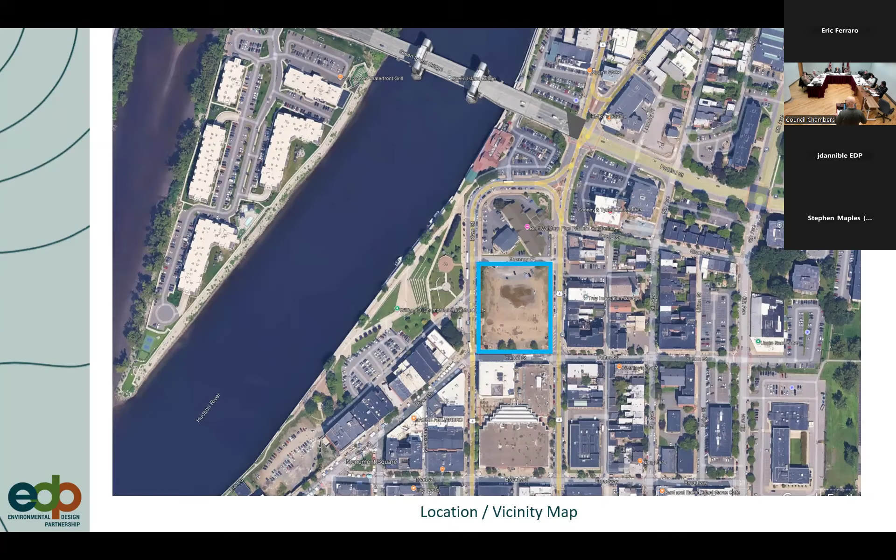I was under the impression that the easement would also grant access to City of Troy emergency vehicles. Yes, so it's an ingress egress easement. Does that need to be a separate easement, or is that covered in that easement language the city has? Doesn't have to be, it could be covered in one document. Let's put it that way.

But the point would be that you couldn't close it off to prevent access — not closing it off, it's to prevent access in perpetuity to the hotel, for their use. And I think similar to any parking lot in the city, in any development, if there's a fire in a building, emergency responders have the ability to use that parking lot. I didn't know there'd have to be a specific easement over that for city use. I think I would be more comfortable if it just granted city emergency access through there.

Okay, okay, I will bring that back to the attorney as well, for posterity. Yeah, simple enough. And like I say, that probably makes sense to get it to you in draft form if you have some additions to it before everyone's executed and it's filed. Yeah, obviously any input of mine would be subject to the agreement of the parties. So, yep.

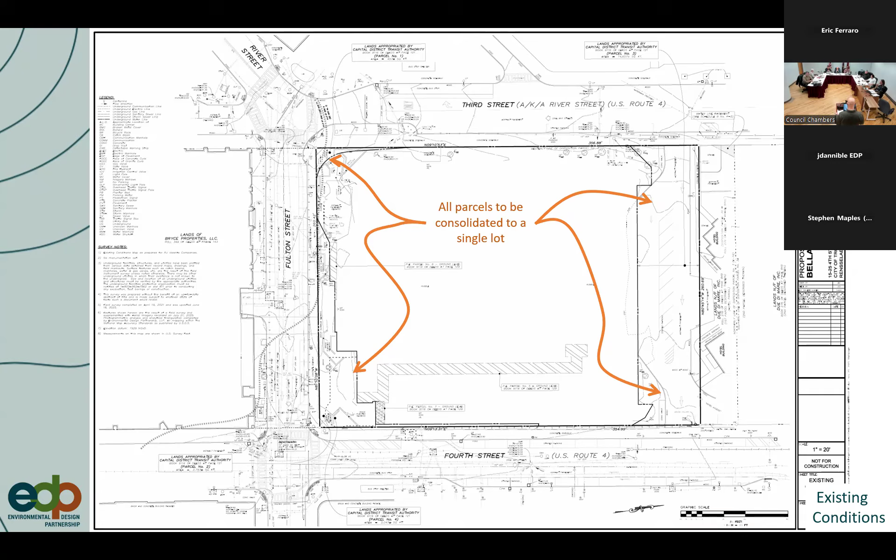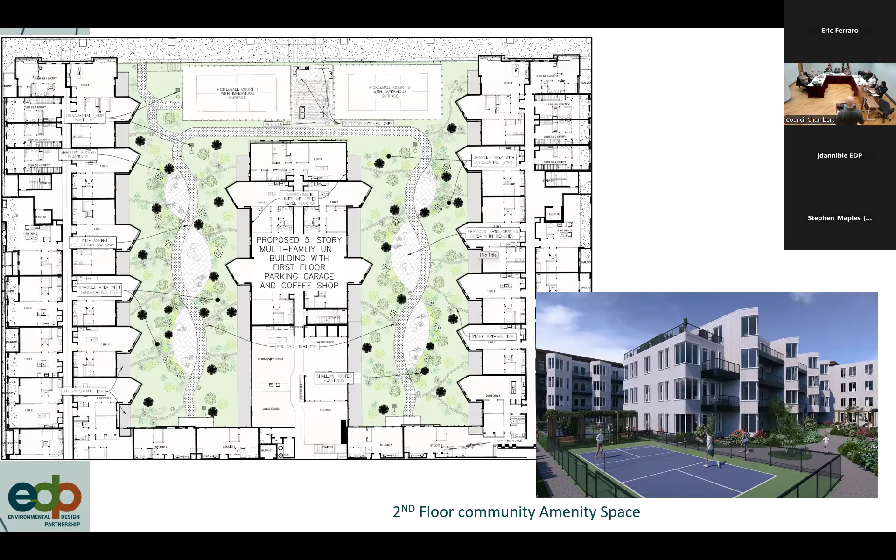Okay. My computer wants to update.

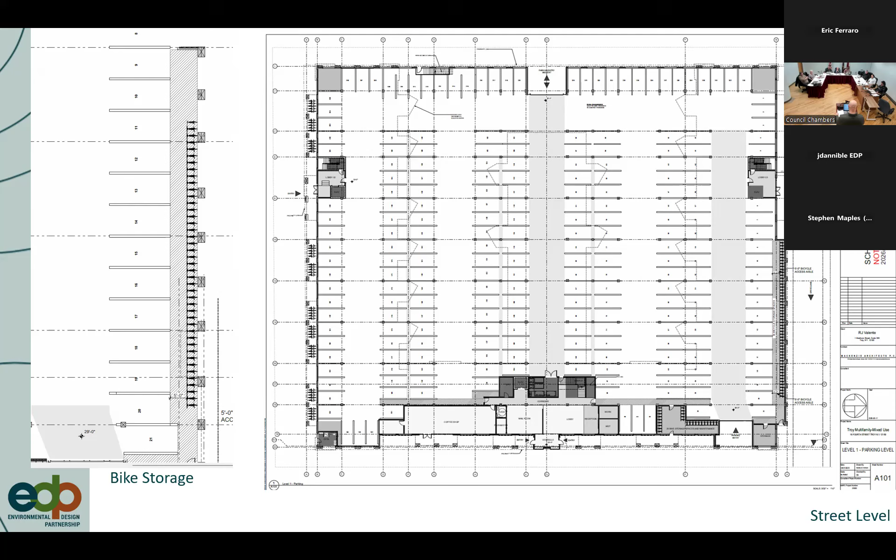Things in place for CDTA, the break room for CDTA. Did you see the email from CDTA? Have not. Okay, they indicated that a 4th Street location would not work because of the distance. I think they proposed a location at the corner of Museum Place and the new 3rd Street. This is all news to me. I was under the impression that was all worked out with CDTA and the architect prior to this.

Other locations, not a problem. Okay, do they want to see that? I got it, they want to see it. I got it, I got it. Came in today, I added it to the plan. I guess the buses stage on New 3rd Street and the distance to walk around the block to get to the break room at the corner of Fulton and 4th would take too much time from there.

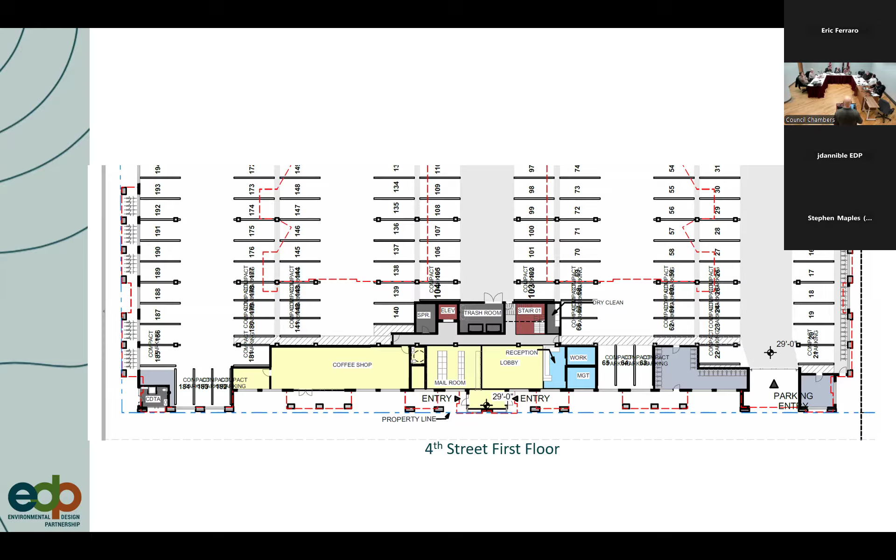So if it works for you, that's good. Yep, we can make it accommodate it. Consider a bigger solution there one day.

Now we get into the updated renderings of the building. As this board is aware, we've been in front of the HRC for the past month. We changed the architectural character of the building to satisfy what the HRC was looking for. We've essentially created, maybe I'll have Steve talk about it a little bit because he knows the architectural terminology much better than myself.

Okay, I'm Steve Maples with Maples Architects. Good start, Joe.

I won't go in too much depth. We had some good meetings with the subcommittee with Jim and Tina and the historic preservation groups, and Eric was there as well, and Chris, and the owner. Basically we have a modified design that, as the preservation committee said, fits into the historic context but at the same time is a modern building. That's actually a comment Robin had about the design. We feel pretty good about how this fits in and how it's going to function for the tenants.

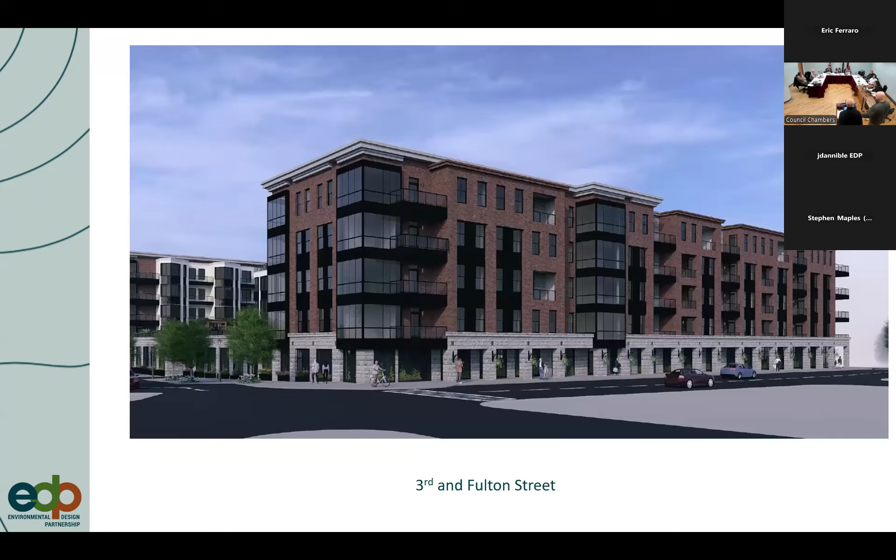On the walking area, Fourth Street side? It's open on the Third Street side, you don't see it on Fourth Street. Do you have a plan that shows that, Joe? No, I'm just looking at the rendering here.

It looks like, why I'm asking, the shading is such that it looks like there's light at the top of the windows, which would mean the light's coming from above. Yeah, I think that's just the software we use for the rendering, sometimes the sunlight appears as a reflection in the window. So which view was that where you saw that? The Fourth Street side. Yeah. Okay.

I assume you're seeing a reflection in the glass from the sun orientation. So on the second floor, do those people have balconies? Everyone has a balcony, and they're also recessed into the building instead of projecting out. They're tucked in between what I call the bump outs, which have the angled walls on the courtyard side. So everybody has a view of the river on the west side of the building that fits within the courtyard exposure.

Good, thanks Steve. Other questions? Is everything clear? I had a question about fireproofing - there's a lot of talk about EVs and fires and all that.

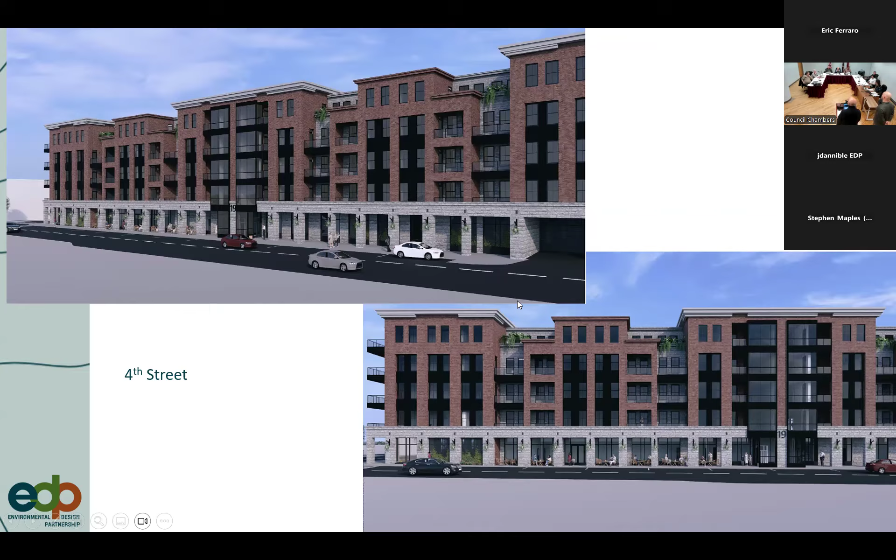For how that works with the adjacent stone area. So the other thing is changing the plane of the facade is what adds interest. It adds shadow lines and creates more of a three-dimensional appeal, if you will. So there's several reasons why we think that's important to do. But happy to discuss, and we can get something together and finalize pretty soon.

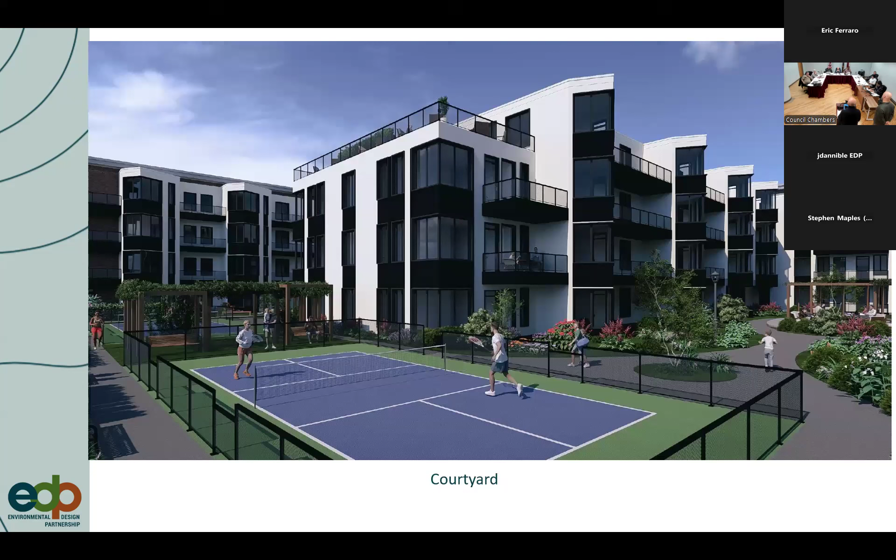Okay, I have a question and I don't even know if it's in our realm, but I was wondering, I don't see any specs on your elevators in the garage, if one of them would be a freight elevator where you can move the furniture and all that good stuff. One has to be a gurney size by definition for the EMS code.

I'm assuming that would be the one on the 4th Street side. The elevators, you mean? Yeah, well, there's one on the north and south and then there's one on 4th Street. I would think we should probably discuss that with the city as well, what you're comfortable as the move-in entry. It could be any side, could be easement for the hotel side.

But we have to look at parking a van. We should probably discuss that. Joe, the best place to park a moving van would probably be on Fulton Street. I think the north side or the south side make the most sense as far as that's concerned.

So when people move in and out, where will their parking be for getting their trucks and whatever to move in? Well, that's what we'll look at, probably on the Museum Place side. Okay, makes sense for considering.

Well, you'll be able to secure that part anyway, whereas on Fourth, Fulton or Third, you're not gonna be able to block off.

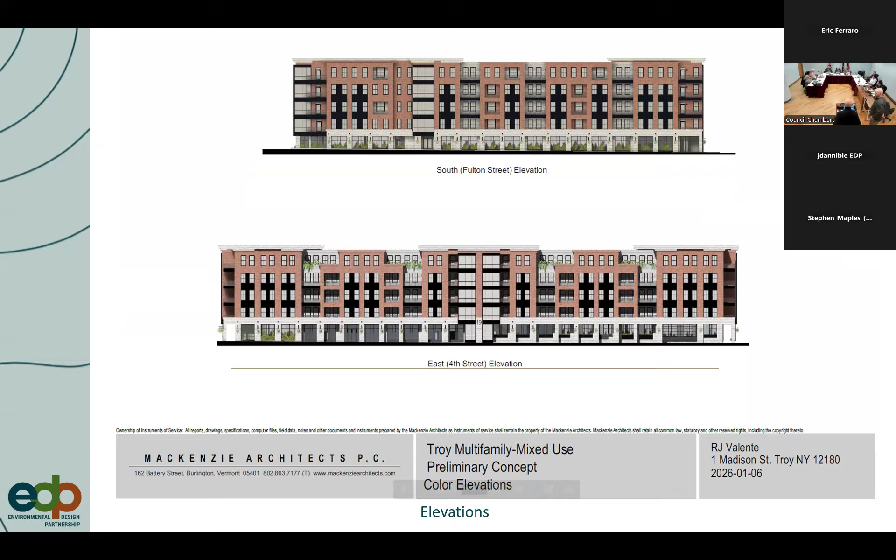Other questions? Yeah, I only have one more question. Going backwards to Museum Place, I don't know if we had covered this once already, but control for the public going down that narrow street. Have we given consideration to all the contingencies of what could happen there? Somebody goes ripping down Fourth, decides to cut through there. It seems like that may be a thing to avoid going all the way by Dinosaur Barbecue and around. Is there any consideration for a speed control or anything like that to make it harder for somebody? I think that'd be a great idea.

One of the things we're doing is that street's narrow with parallel parking, so there are traffic calming features: a narrow entrance where you have to slow down to take the turn, narrow space going down the road, tight between two buildings, street trees there, and again narrow with the appearance of a gate on the Fourth Street side.

So it's going to be one way, from Third to Fourth. My concern was the Fourth Street into Third direction — that way it seems like it would be a natural thing for some crazy people to do.

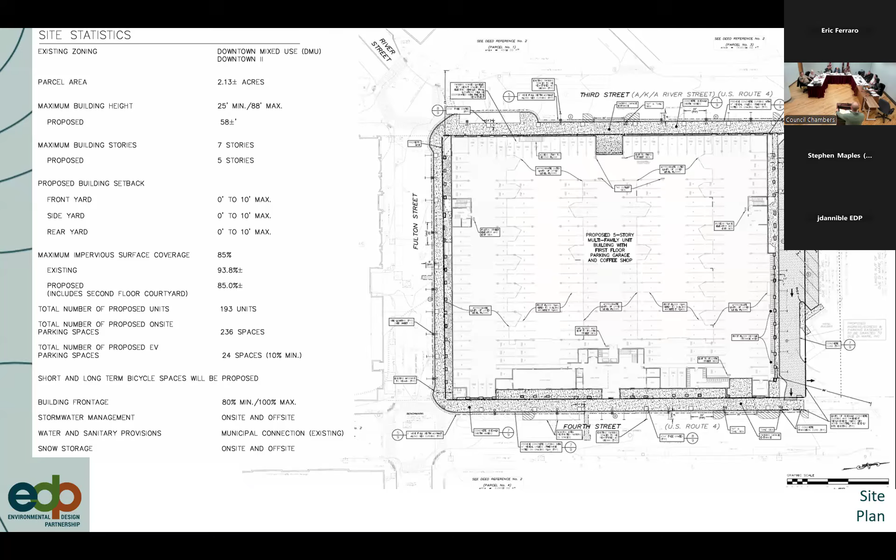Sure, good evening, Chairman, members of the board. Brian Sipperly with Verity Engineering. Just as a quick recap, we represent the owner and applicant, Energy Catalyst Technologies, in their pursuit to construct a 10,000 square foot expansion on the building. This project was initially in front of the board back in December.

We received a number of variances from the Zoning Board of Appeals that allowed us to come back and continue the discussion in January. I believe at the last month's meeting there were really no open issues. We committed to and solved a lot of the comments on the staff report, and I believe we were just waiting for ministerial action to conduct a public hearing this evening.

Okay, so we're ready for the hearing if you are. I am. Any questions for the applicant before we have the public hearing? Okay, thank you.

Is there any member of the public here to speak on this application? Come forward. There being no one here, Eric, do you have anyone on? No, I have no one on Zoom. So there being no one who wishes to speak on the application, we'll close the public hearing and open it up to further board discussion.

I'm very happy with the proposal. I think it's going to be a great thing. Any questions from the board? Is there a motion? I make a motion that we give them final approval at the public hearing tonight. I'll second that motion.

Is there discussion on the motion? All in favor, say aye. Aye. Opposed, say no. The motion carries unanimously. You're done. Thank you. Good evening. Good luck. Good night.